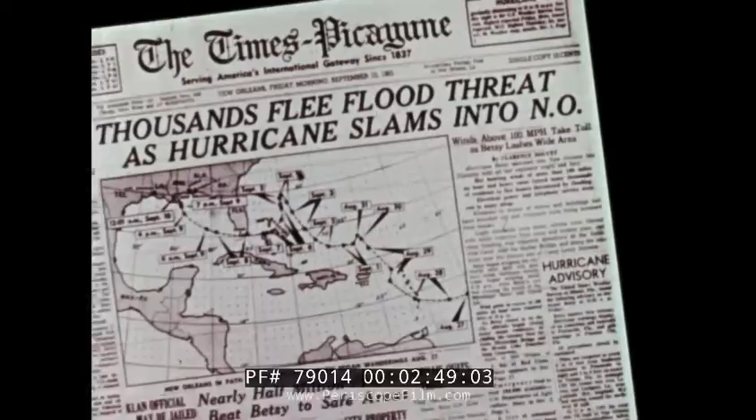But in late summer of 1965, the forces of nature brought the city to her knees. On the night of 9 September and the morning of 10 September, she was struck by Hurricane Betsy, one of the worst storms ever to hit the United States mainland.

As the hurricane moved north on a course paralleling the Mississippi, wind velocity ranged from 70 to 105 miles per hour, with gusts up to 160 miles per hour. Tides rose more than 16 feet above normal in a few hours, and rainfall amounted to nearly 6 inches.

In her wake, Hurricane Betsy left damage estimated at $1 billion in the port of New Orleans alone. Marine underwriters termed it the most costly natural disaster in maritime history. The largest single Navy casualty was AFDM-2, Auxiliary Floating Dry Dock Medium, which since 1943 had served the port from this shipyard on the Mississippi's west bank in the Algiers section of New Orleans.

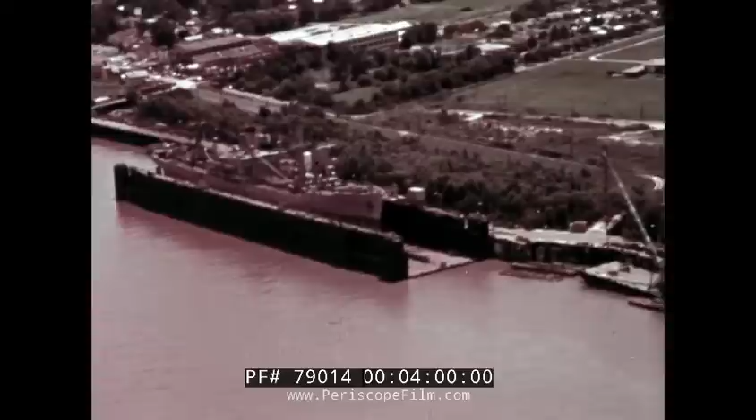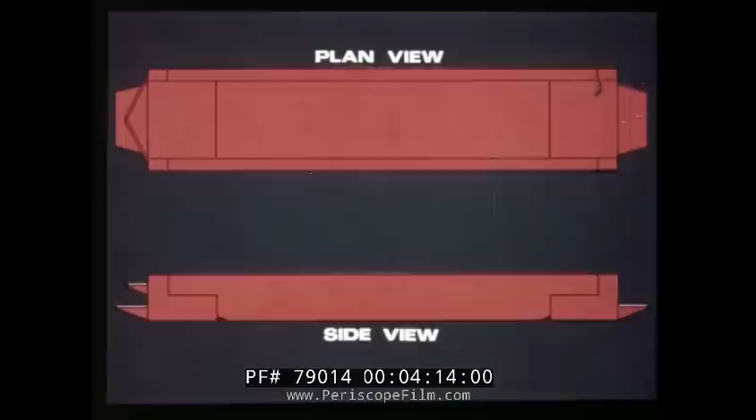She had been operated by Todd Shipyards Corporation under lease from the Navy, and in 23 years had docked more than 2,600 ships. With a maximum lifting capacity of 16,000 long tons at zero freeboard to the pontoon deck, AFDM-2 is 544 feet long, and outriggers at each end give her an overall length of 614 feet. She is 116 feet wide, and her overall depth is 52 feet 9 inches. Her light displacement is 6,360 long tons.

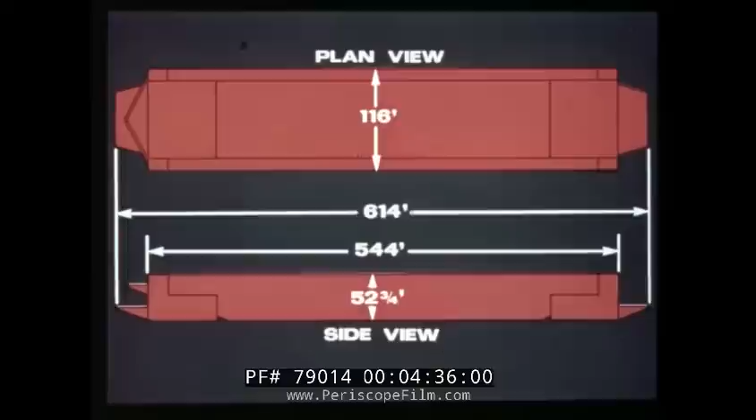When the hurricane struck, AFDM-2 was servicing the SS Elizabeth Lykes, a new automated freighter, shown here docked in a similar facility. As the storm-driven tidal surge roared up the Mississippi, the dry dock was torn loose from its mooring spuds. Still cradling the freighter, she drifted into the river and headed upstream.

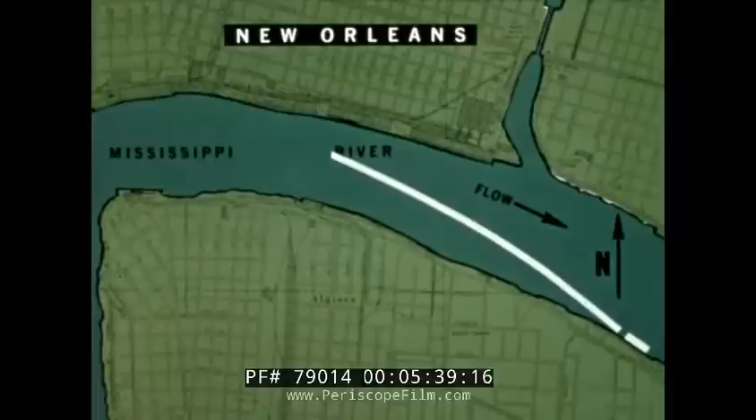Next morning, when she was located, AFDM-2 was completely capsized, barely floating, in water varying from 128 to 180 feet deep. The Elizabeth Lykes, which somehow had miraculously escaped the dry dock and floated free, was found a half-mile away, aground on the levee, but virtually undamaged. On her erratic journey, AFDM-2 had crossed the 1,100-foot-wide river and gone 3 miles upstream. She came to rest some 300 feet off the east bank.

Within hours, salvage experts were studying the situation. In New Orleans, 8th Naval District salvers already were poring over the preliminary report of damage. In Washington, officers of the Naval Ship Systems Command checked the availability of salvage craft and ordered the heavy-duty salvage ships Cable and Curb to proceed to New Orleans immediately. The Cable from its station at Key West and the Curb from its position in the Atlantic off the coast of Jacksonville.

In New York, experts from the Marine Salvage Division of Merritt Chapman and Scott Corporation boarded a plane for New Orleans. By 11 September, representatives from all three were on the scene. They found the capsized dry dock still taking on water and more than 80% submerged. Salvers promptly took steps to keep her from sinking completely.

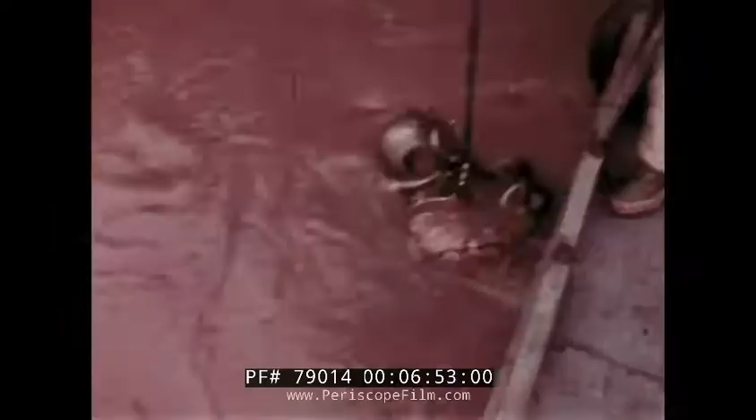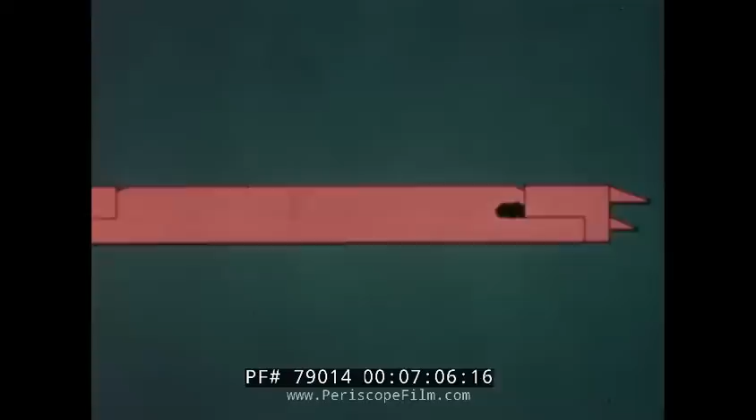A crew of skilled divers was sent down to determine the extent and location of damage. Surprisingly, their preliminary reports were encouraging. Of the more than 100 holes ripped in the hull during the storm, most were small breaks in the wing walls. Only one break was considered serious, an oval-shaped gash at one end of the center section. Measuring 20 by 15 feet, it probably shipped most of the water that caused the dry dock to capsize.

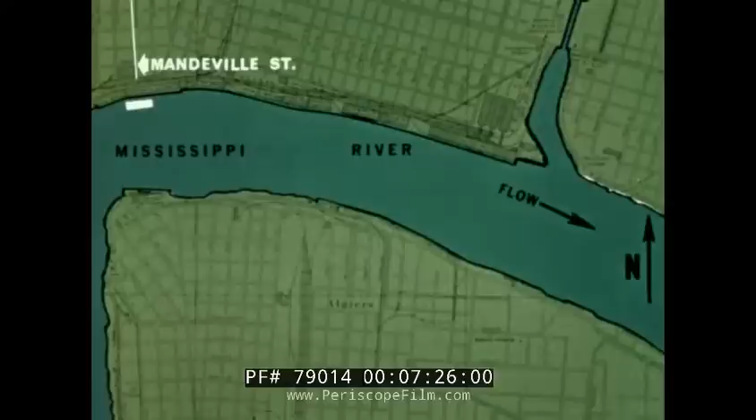One of the first orders of business was to move the dry dock from the east bank off Press and Mandeville Streets, where she was a hazard to navigation, to the west bank off Vallette Street, in an eddy of a bend in the river.

At Vallette Street, divers pinpointed every break in the hull plating and checked the structural integrity of the wall surfaces. They reported the bottom pontoon sections had suffered a few breaks, but were generally in good condition. Internal structural damage seemed minimal. Salvage of AFDM-2 appeared to be technically feasible. But would it be economically sound? Navy and contractor salvers pondered that question.

The Navy built AFDM-2 in 1942 for $2,760,000. To replace her at current prices would cost between $7 and $8 million. Salving her would cost considerably less, and since the dry dock was insured for $2.7 million when the hurricane struck, this sum would be available to defray the cost.

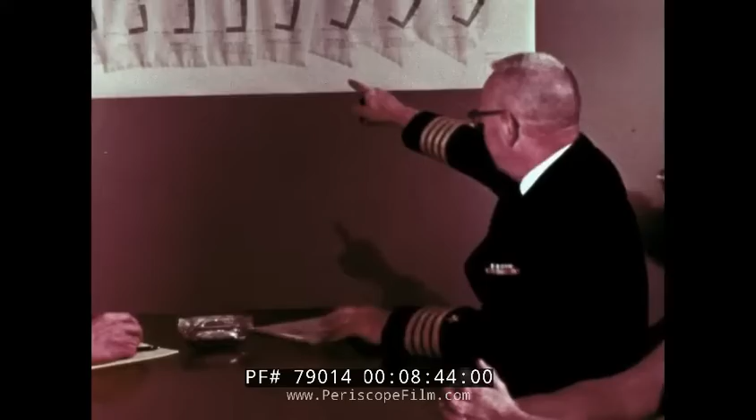The alternative to salving would have to be piece-by-piece removal, a lengthy, costly, and dangerous procedure. It became apparent that if AFDM-2 could be salved at a cost that would be within the total insurance funds available, this would be the desirable course.

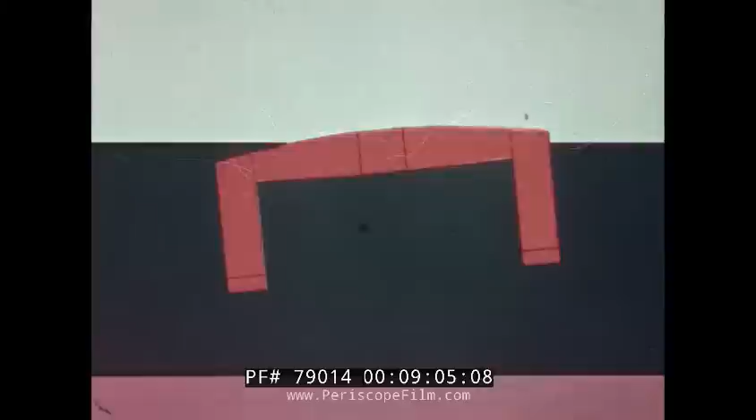On 23 November, the Navy approved a plan to refloat the dry dock and authorized Merritt, Chapman, and Scott to undertake the project. The plan was unique in the long history of Navy salvage operations. Simply stated, the unwieldy dry dock was to be snugged against the river bottom in the capsized position and then rolled up and over through 90 degrees, 160 degrees, and finally 180 degrees toward the river levee, a procedure salvers call parbuckling.

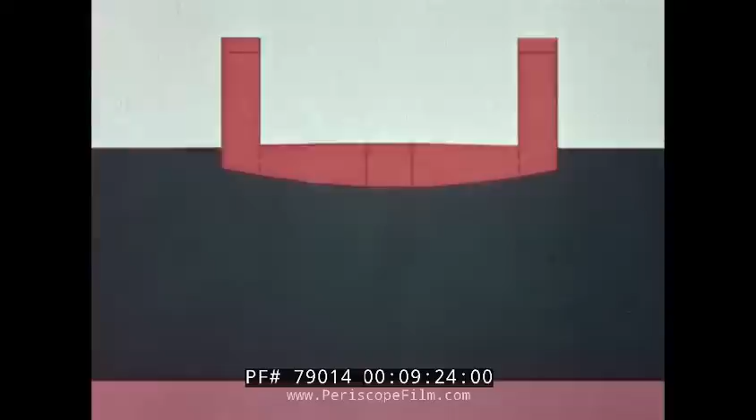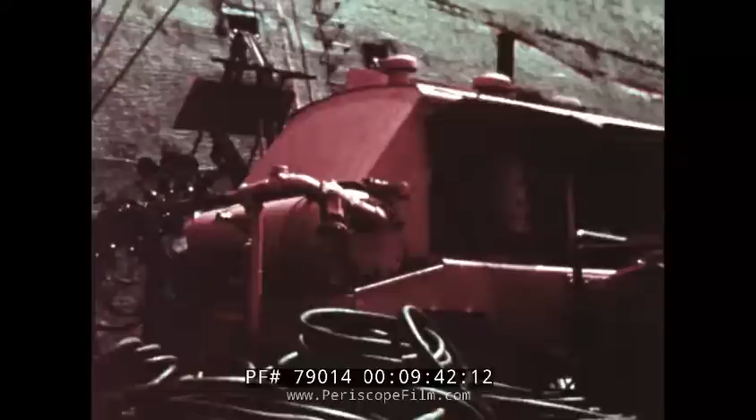The complex plan had the virtue of being designed around individual techniques that had been tested on other large-scale salvage projects: land-based beach gear, ballasting to alter internal weight forces, compressed air to provide internal buoyancy, and large rubber pontoons to provide a source of external buoyancy. This time, however, all four were to be employed in a carefully predetermined combination. The operation was to be accomplished in 12 stages.

As the hull rotated, AFDM-2's basic characteristics, center of gravity and buoyancy and wetted surface, would change constantly under a wide variety of ballast conditions and angles of inclination. So would the stresses and strains on the hull. It would be absolutely necessary to keep the dry dock under constant control during each stage of parbuckling.

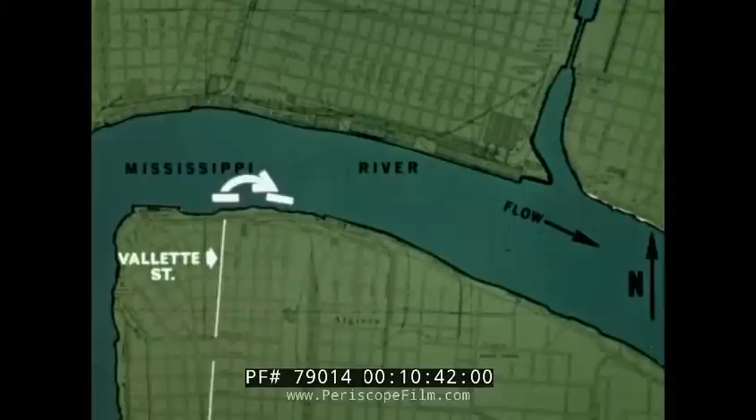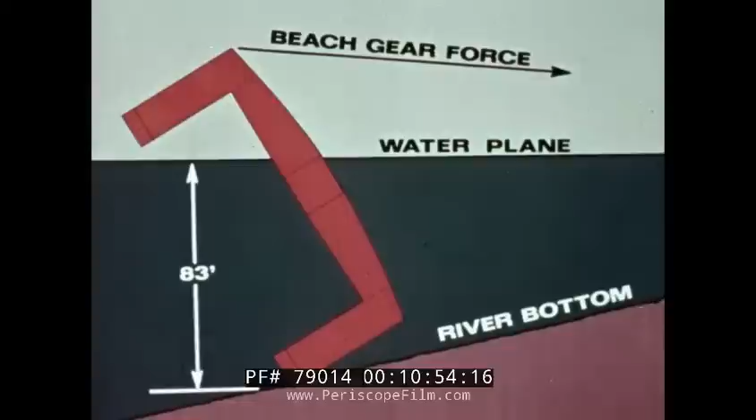The Vallette Street site did not meet the conditions called for in the salvage plan. So on 27 November, the dry dock was moved to a site off Pacific Street, 1,500 feet downstream. Here, one wall of the dry dock could be grounded in a depth close to the desired 83 feet, on a reasonably firm bottom with only a gentle slope toward shore. The site offered adequate space behind the levee for the installation of land-based equipment.

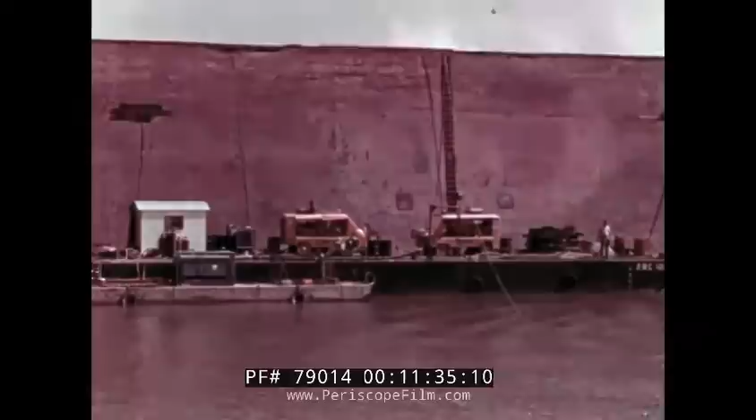Offshore, a number of specialized salvage ships had been assembled. The salvage ship Curb, which was to alternate on the project with her sister ship Cable, each equipped with a machine shop, diving locker, towing engine, anchors, pumps, and compressors. 2 Navy lift ships, Salvager and Windlass, assigned to moor AFDM-2. 3 flush-deck work barges, obtained from the Army Transportation Service. The salvors equipped these with compressors, welding machines, cranes, and auxiliary equipment.

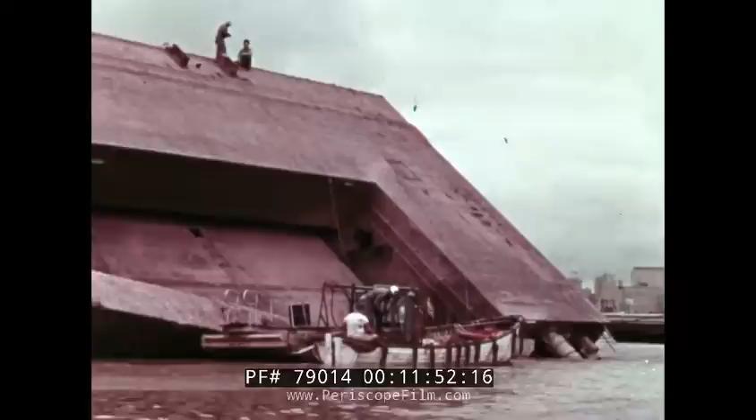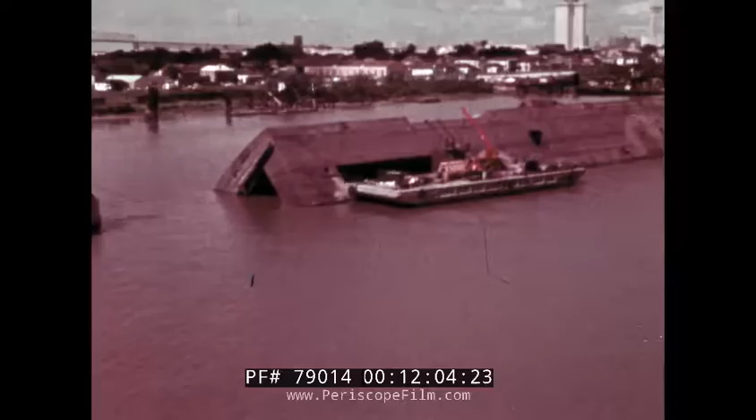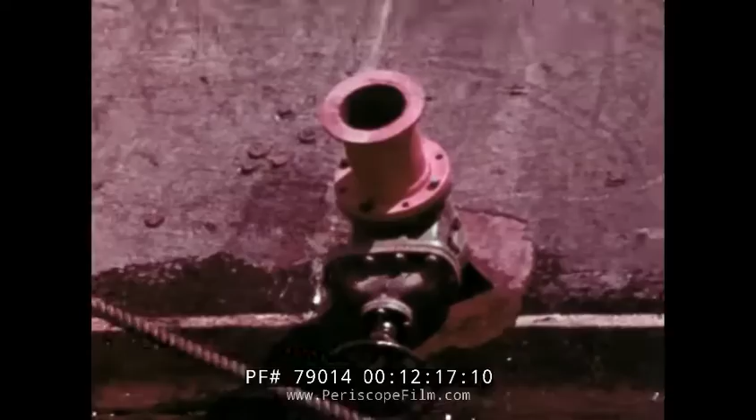Preparing the dry dock for parbuckling required the services of more than 100 skilled specialists. Workers concentrated on 2 jobs: making repairs to the hull that were deemed necessary, and installing the valves, vents, pad eyes, and other fittings to be utilized during parbuckling. Only those holes that would be underwater during parbuckling would have to be patched. Some repairs below and near the waterline were necessary, however. The many air and ballast intakes and vents required for parbuckling also were installed at this time.

2 8-inch gate valves designed for both the intake and discharge of ballast were installed in each of the 8 center section ballast compartments, 1 8-inch gate valve for flooding in each of the 8 ballast compartments of the end sections, and 2 3-inch globe valves in 2 center section buoyancy chambers.

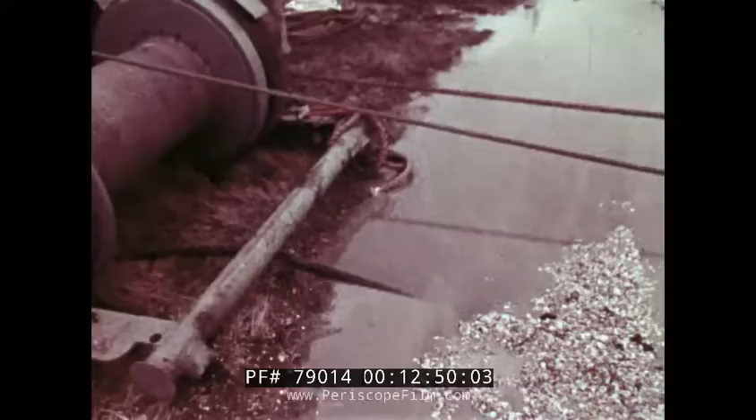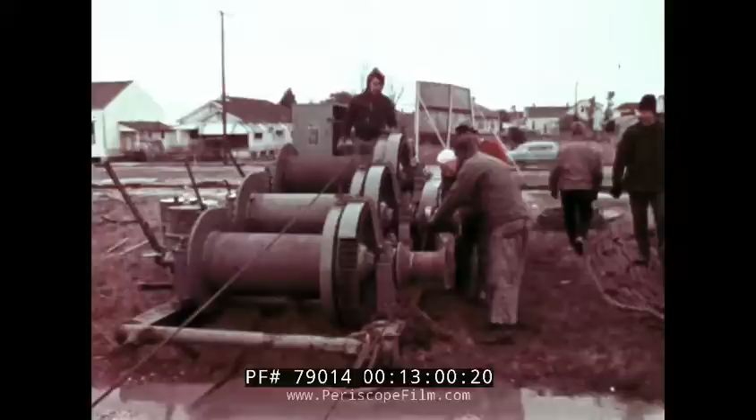On land, another workforce was busy installing the 16 sets of winch-driven beach gear that would provide a vital horizontal pulling force toward shore of up to 680 tons during rotation of the dry dock. Gasoline and diesel-powered winches acting through a 9-part purchase tackle rigged to cables attached to the dry dock would provide the pulling force.

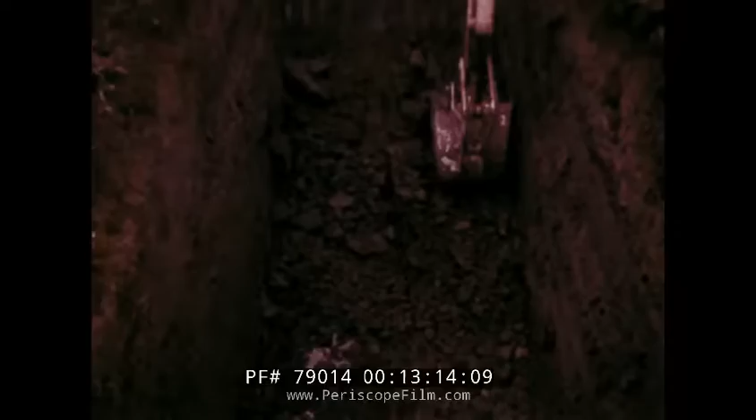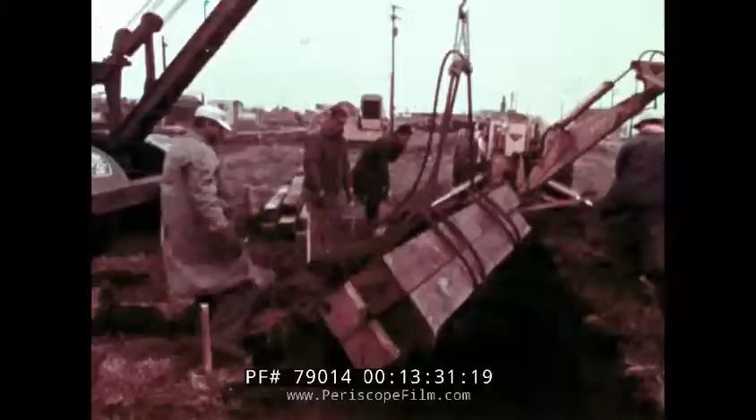Several hundred feet behind the levee, a tractor-mounted backhoe dug 6-foot-deep excavations for the deadmen that would secure the beach gear tackle. The working face of each excavation was lined with 6x6 timbers, and the deadmen, which consisted of 4 12x12 timbers 10 feet long, tied together by a wire cable bridle, were positioned. Then the excavation was backfilled.

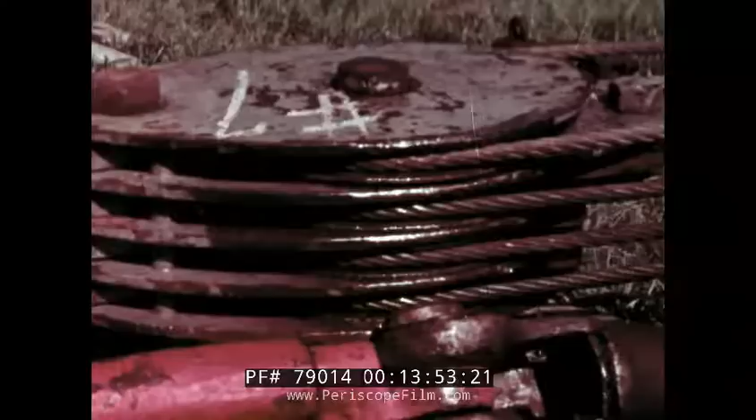To allow engineers to determine minute by minute whether calculated conditions were being met, for the first time on a salvage project, each beach gear set was equipped with a device to provide continuous reading of the force being exerted. A strain-link tensiometer, developed especially for this project by the Navy's David Taylor Model Basin at Carderock, Maryland, was installed between the dead men and standing block of each beach gear set.

Direct reading dials at each winch allowed the operator to check the beach gear pull. Stylus recorders in this communications and control center enabled the project engineer to continuously monitor the entire beach gear network. Adjustments were ordered by phone or radio.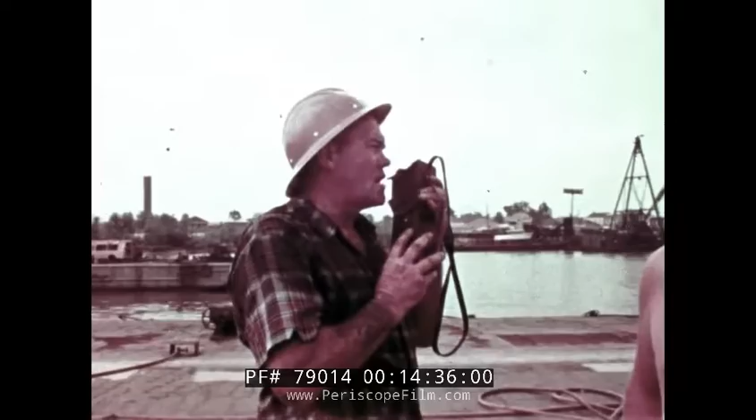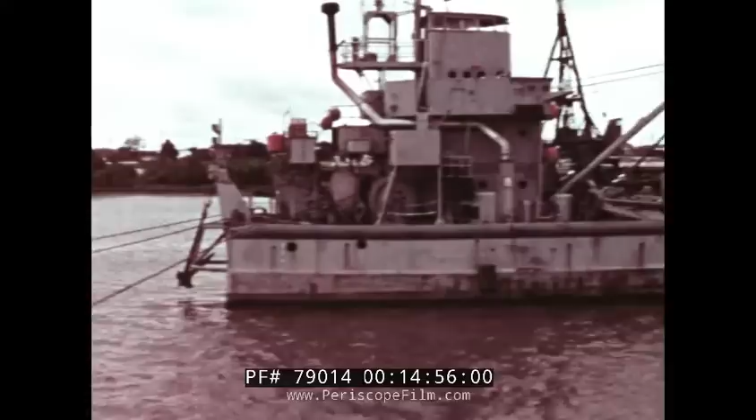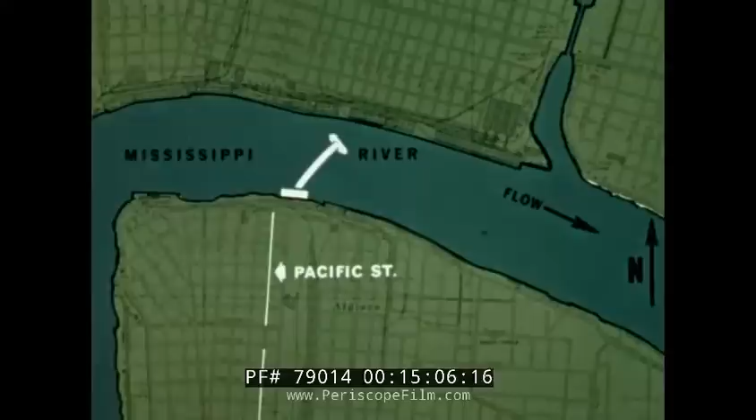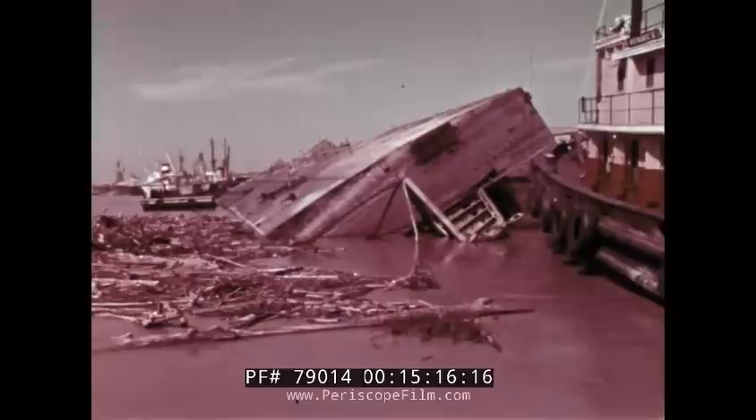By mid-February 1966, preparations on the dry dock had reached the stage where the B-wall could be raised for final repairs and inspection. Suddenly, in the pre-dawn hours of 16 February, a surge of water and debris resulting from upstream floods ripped the dry dock from its moorings. Together with the lift ships Salvager and Windlass, AFDM-2 drifted across the Mississippi under cover of dense fog. They came to rest off the east bank near Congress Street Wharf, approximately 1,400 feet across the river and 500 feet downstream of the salvage site.

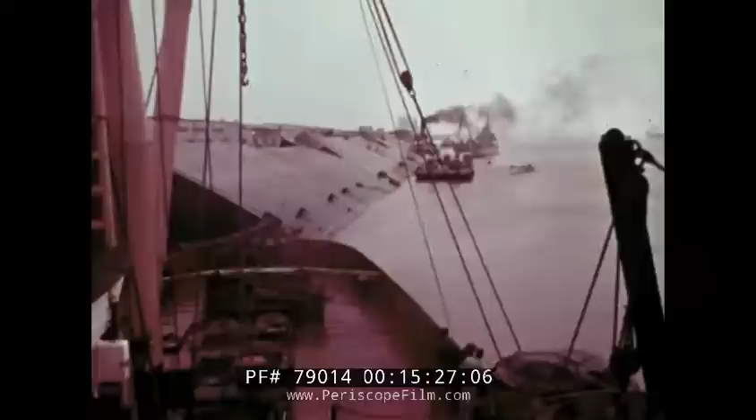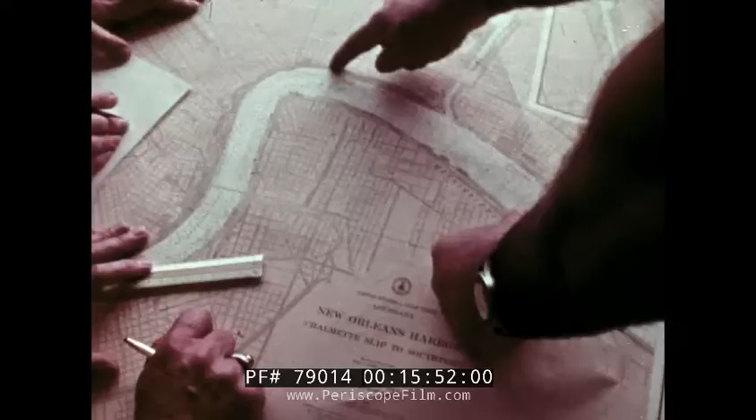The dry dock had suffered no additional damage, but the job of returning her to Pacific Street was a formidable one. The high level of the Mississippi and strong current conditions were the major complications. In marine salvage, however, a basic truism is that the unexpected generally is to be expected. Within a week, the salvers had devised a plan to return the 614-foot dry dock and began assembling the men and equipment to do the job. It required more than 100 men and 12 ships, the Curb, Salvager, Windlass, and 9 local tugs. 13 March, a Sunday, when river traffic is light, was picked as the date.

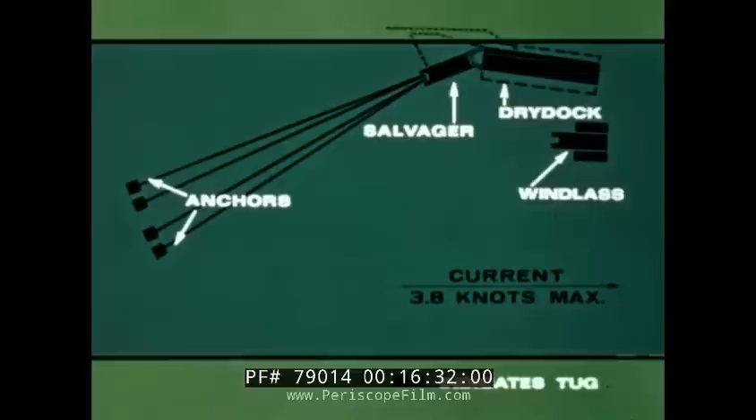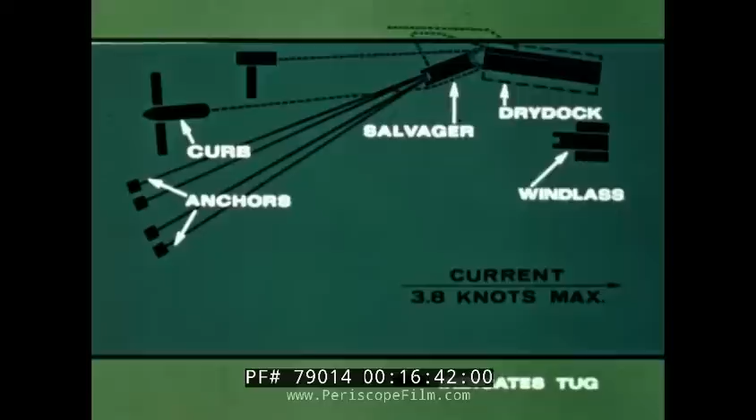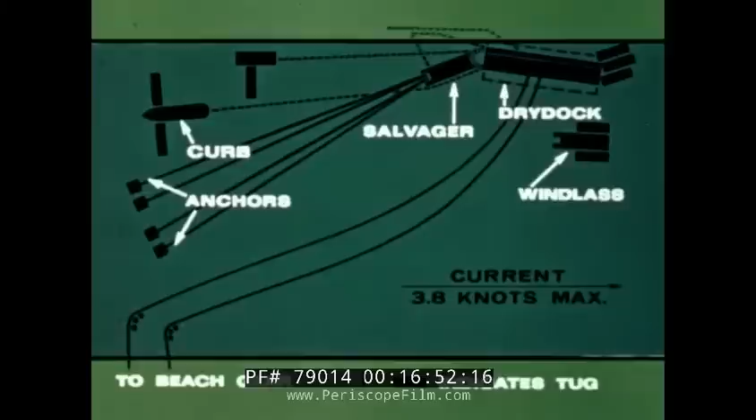The basic plan was to swing the dry dock across the river in pendulum fashion, with a pivot formed upstream of AFDM-2 by 4 anchors planted in mid-river. The arm of the pendulum was formed by cables from the anchors to the Salvager, which was moored to the dry dock. Upstream, the Curb and a 2,400 horsepower tug were assigned to maneuver the dry dock so as to maintain its longitudinal axis in line with the anchors. 3 pusher-type towboats were positioned at the downstream end for the same purpose. Finally, 2 sets of beach gear planted on the opposite bank of the river were attached to the dry dock to control the swing of the pendulum.

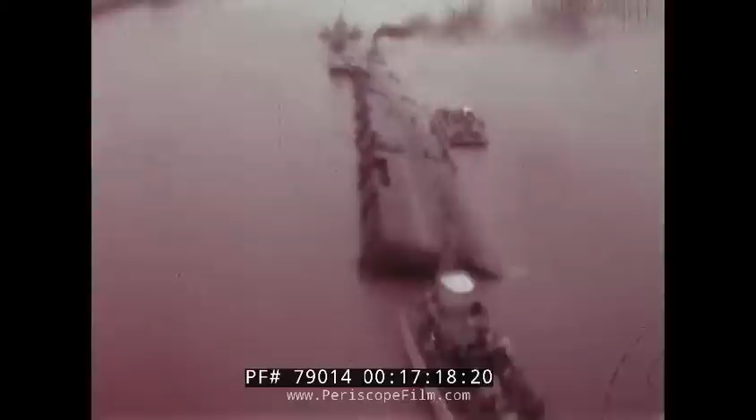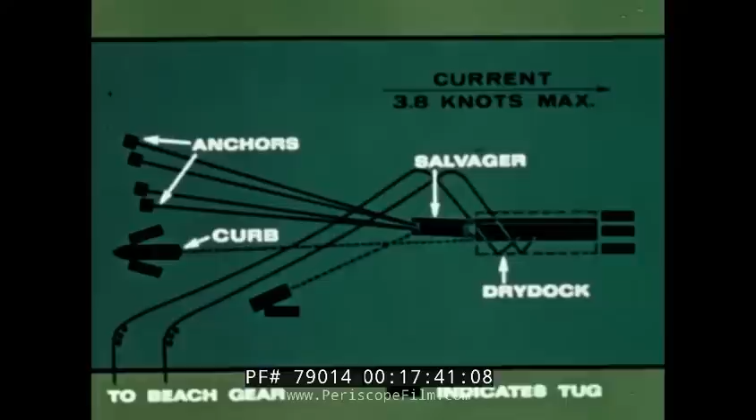With her ballast compartments dewatered by compressed air to float her, AFDM-2 was eased into the channel, where she began to swing on the anchors. In mid-river, however, the strong current caused the anchor moorings to slip, and the winches of the Salvager no longer were able to maintain control of the anchor lines. It became necessary to put into effect a prearranged alternate plan of action. 7 tugs and the Curb, with a total of 15,850 horsepower, were repositioned in this manner to bring the dry dock under control. They pulled and pushed her toward the west bank, where she was secured off Pacific Street at 1818 hours, just 18 minutes behind schedule.

But by now, the Mississippi was approaching its yearly high-level flood stage. Even before the breakaway, engineers had decided to wait until after the annual river crest had passed before undertaking the parbuckling operation. Work on the dry dock was halted for a 3-month period, during which a security crew kept round-the-clock watch on the moorings and adjusted beach cable tensions as the river level fluctuated. By June 15, the Mississippi had fallen to a level that allowed work to be resumed. Welders installed 68 pads for the rubber pontoons, and within a month, all necessary hull repairs had been completed.

Now the dry dock was turned end for end to place her in the proper position for parbuckling. The A wall, the one with the large gash, became the offshore wall. It would remain above water during parbuckling. All that remained was the installation of pads for the beach gear cables. Preparations were completed. Salvers were ready to put into effect the carefully engineered 12-stage plan to rotate the dry dock 180 degrees from the inverted position.

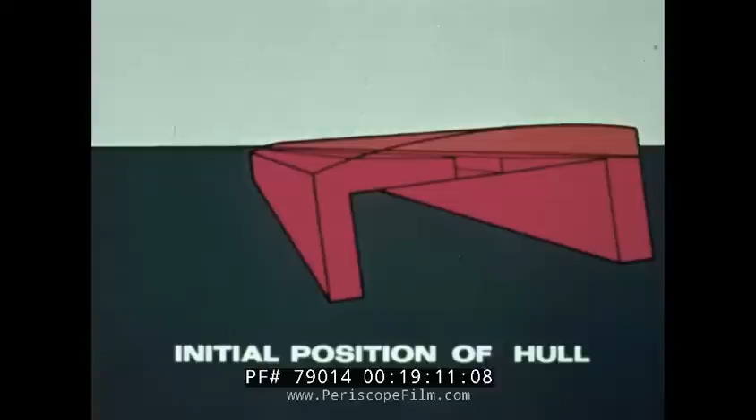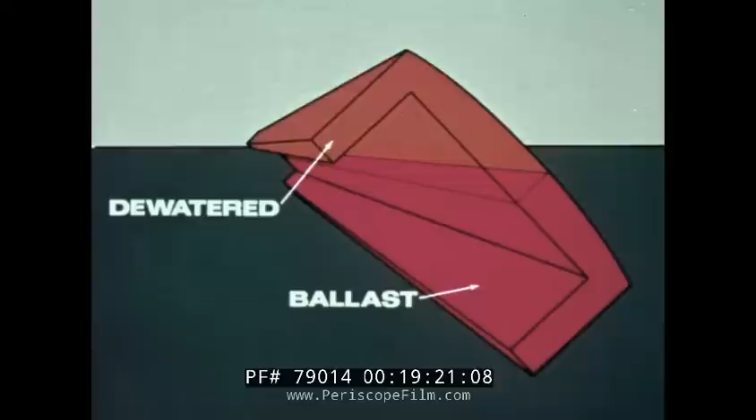Stage 1 called for the B wall to be grounded on the river bottom in 83 feet of water. To accomplish this, 18,900 tons of water ballast were added to compartments in the inshore wall, while offshore wall compartments were dewatered. These steps, however, failed to raise the A wall to the desired goal of 46.5 degrees.

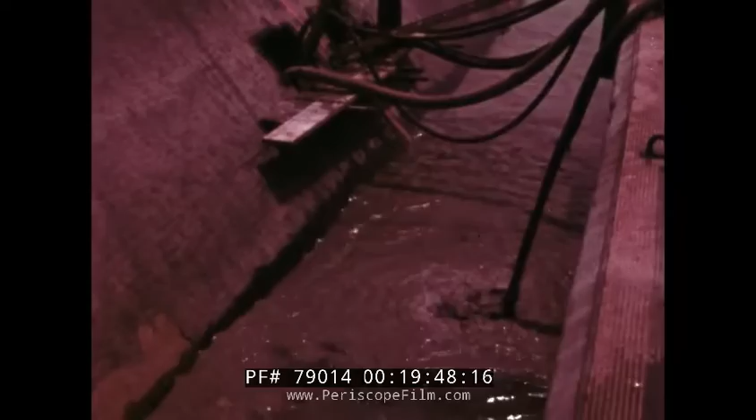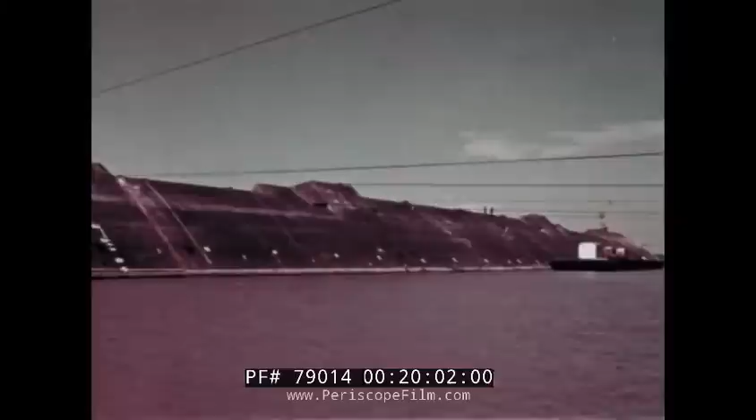Keeping the hull from heeling were large deposits of dense mud that had permeated many of the compartments, especially in the A wall. For 8 days, mud and water, 2,000 tons of it, were jetted and pumped from the A wall compartments. Slowly, the dry dock rotated until it reached 45 degrees, still short of the 46.5 degrees called for by stage 1, but well within acceptable limits.

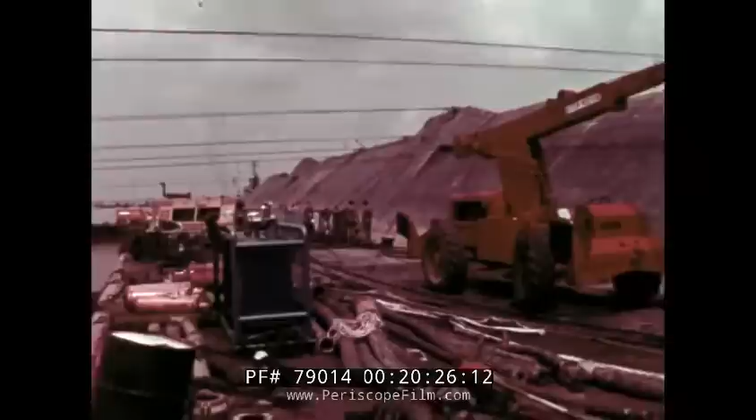To reach stage 2, 60 degrees, the land-based beach gear were to be brought into play. It was calculated that a horizontal pulling force of 551 tons applied to the chine line of the A wall would bring the dry dock to stage 2. But this force failed to rotate the dry dock to 60 degrees. Once again, mud was the problem.

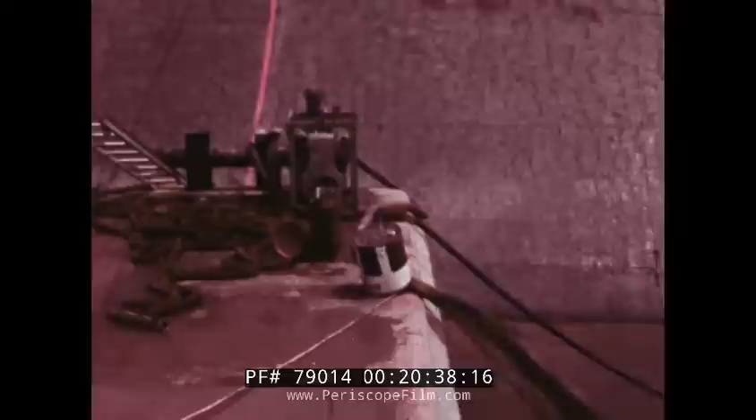Divers found a thick layer clinging to horizontal stiffeners within the hull. Its quantity and location were the upsetting factors. Pumps went to work around the clock, and beach gear force was increased to an average of 650 tons. It took 8 days to reach stage 2.

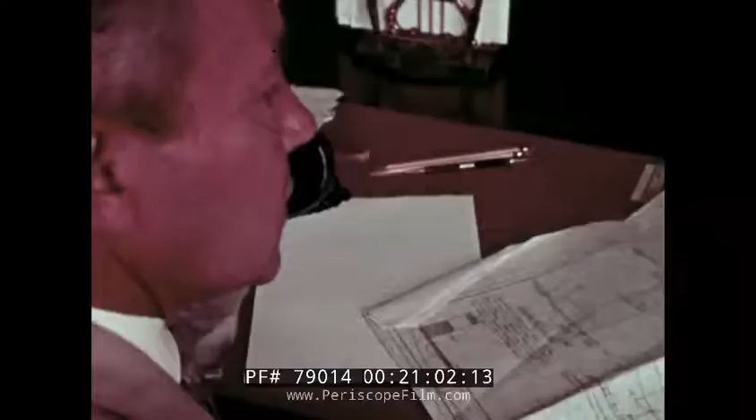The presence of mud was not unexpected. While the engineers' computations had been made on the assumption that comparatively small quantities remained trapped in the hull, they knew this was unrealistic. It was a necessary assumption, however, because it was impossible to determine with any degree of accuracy the location and quantity of mud. The salvage plan had to be based on known factors only, and the engineers realized that field adjustments would be necessary.

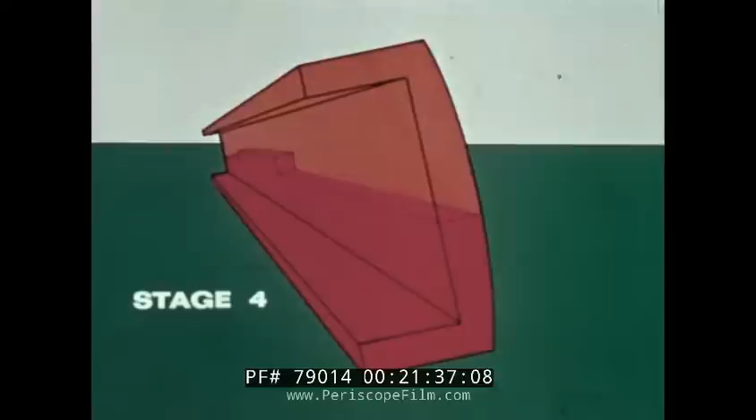The angle of the dry dock was now 59.5 degrees. The key to reaching both the stage 3 position, 70 degrees, and the stage 4 position, 80 degrees, was the addition of water ballast to the center sections. On the day stage 2 was reached, 1,400 tons of ballast were added over a 3.5-hour period to the buoyancy chamber compartments adjacent to the midships transverse bulkhead. 26 hours later, the hull reached the stage 3 position of 70 degrees.

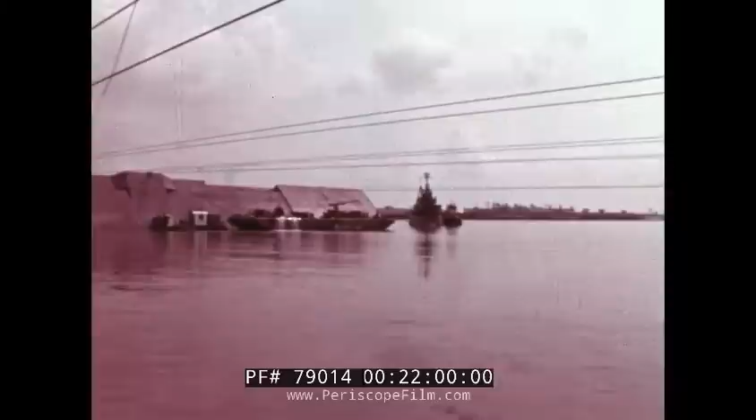As the beach gear force was increased to 600 tons, the dry dock rolled steadily to 80.5 degrees from the inverted position, half a degree more than had been calculated for stage 4. Now the operation entered a crucial phase. When the salvage plan was formulated, it assumed a level river bottom under the B-wall as it moved into the 90-degree position. Actually, the salvage site sloped upward toward shore. In the planning stage, engineers realized that the slope could offer enough resistance to the beach gear force to prevent the dry dock from rotating to 90 degrees.

Dredging the site to level it before the dry dock was positioned had been considered. However, there was always the chance that the river might wash out enough mud to reduce the slope, or that the weight of the dry dock might compact the mud enough to allow the dry dock to settle. If either action took place, dredging could be avoided. But the hoped-for scouring action or compaction did not occur, and the dry dock held at 83.5 degrees. In a further attempt to eliminate the need for dredging, several operations originally scheduled for later were undertaken.

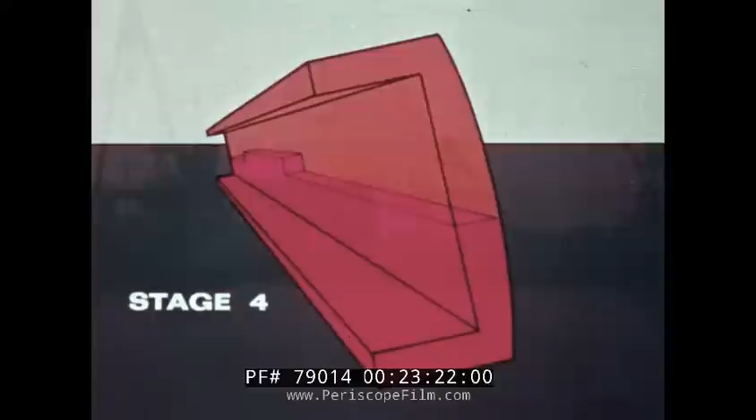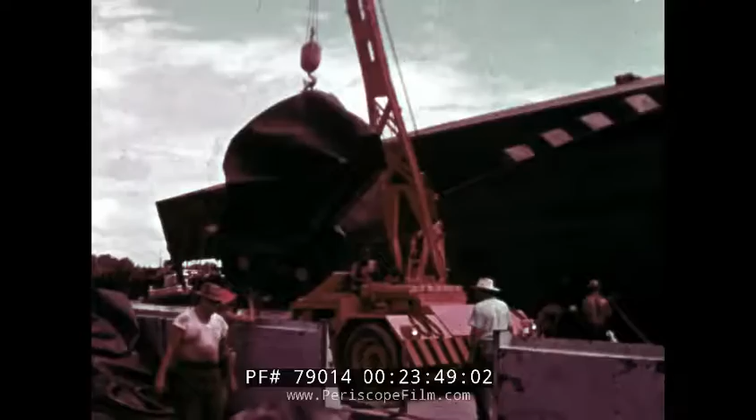First, 2,500 additional tons of water ballast were added amidships. Beach gear force was maintained at 650 tons, almost 200 tons higher than had been contemplated. Finally, engineers decided to employ the third force, the air-filled semi-sealed rubber pontoons that originally were scheduled to furnish an external buoyant lift at stage 6. Similar collapsible pontoons have been used on salvage projects before, but never in this quantity, nor in this manner.

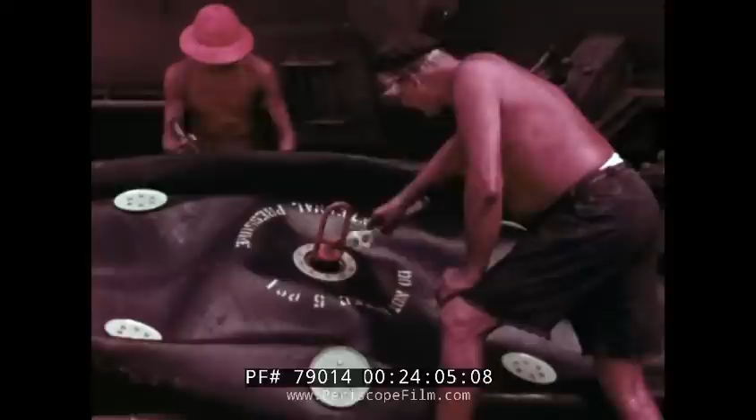This salvage plan called for a total external buoyant lifting force of 600 tons to be applied by 68 pontoons attached to cables secured to the weather deck of the B-wall. The 3/4-inch thick rubber pontoons were 8 feet high and 7 feet in diameter when inflated. Each provided a buoyant force of about 8.5 tons. They were not completely sealed. A 9-inch diameter opening at the bottom provided access for air and venting. On 11 August, with the first 10 pontoons in place, 800 tons of ballast were added.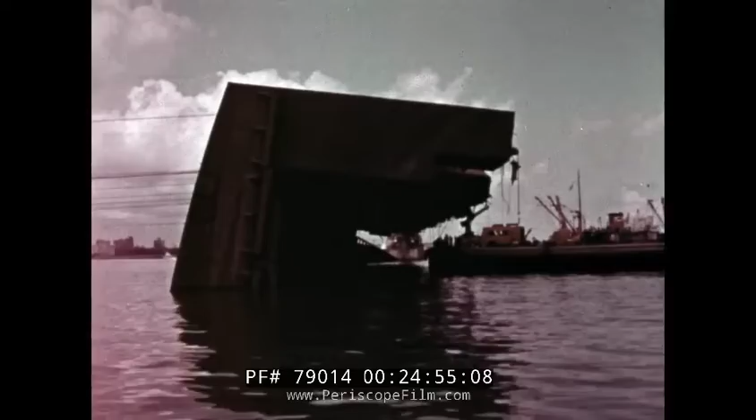Next day, 15 more pontoons were installed and 500 additional tons of ballast taken on. 31 more pontoons were attached in the next 2 days, but still the dry dock failed to heel. Dredging was necessary. On 15 August, a dredge began to cut a trench extending along the shoreward chine line about 2/3 the length of the dry dock. The trench, 15 feet wide and 10 feet deep, was completed in 2 days.

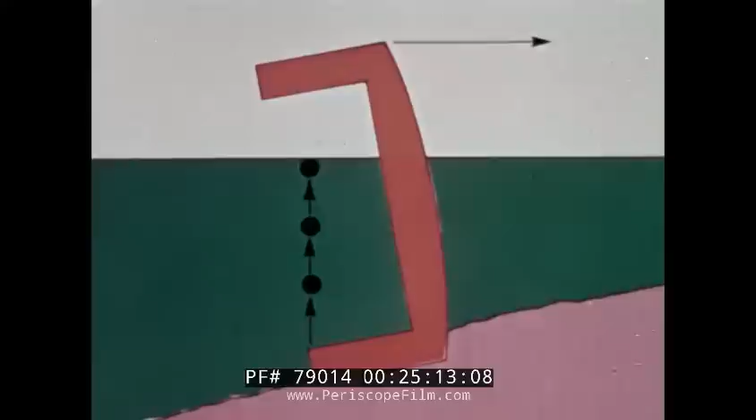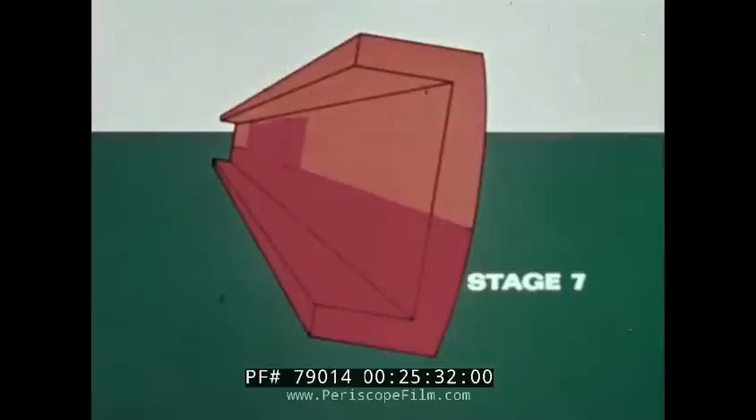As the dredge pulled away, the beach gear sets were stressed to pull the dry dock into the trench. Within hours, it rotated through the critical stage 5 position of 90 degrees, through stage 6, and reached 100 degrees, stage 7. Meantime, the beach gear force gradually dropped until at stage 7, only 250 tons were required to hold the dry dock in equilibrium at 100 degrees.

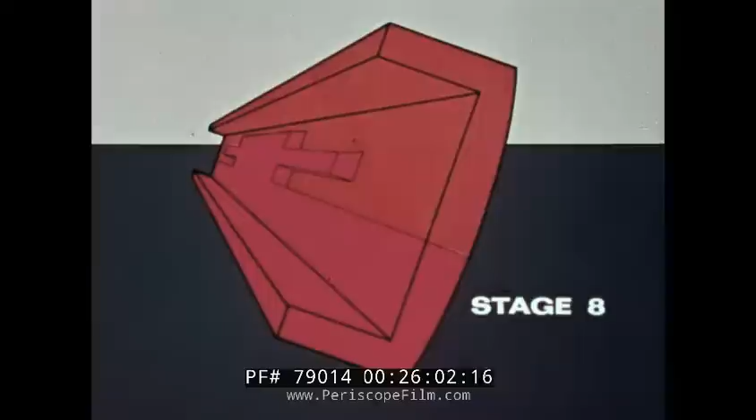The following day, this pull was increased to 315 tons. The dry dock came easily to 109 degrees, only 1 degree short of the calculated Stage 8 position. Stage 9 called for the dry dock to reach 120 degrees. On 19 August, after 2,100 tons of water ballast were added to increase the total to the 5,900 tons calculated for this stage, the dry dock rotated to 118 degrees within acceptable limits. Beach gear force was 150 tons, exactly as planned.

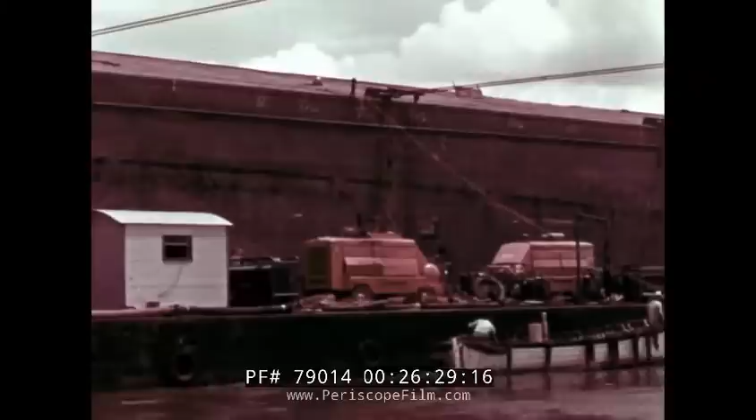Now the salvage crew prepared for another crucial period. It was time for compressed air to replace beach gear as the prime force rotating the dock. The plan called for the injection of enough compressed air to blow 560 tons of water ballast from the center section of the B wall. While the center section was being deballasted with air, 2,000 tons of water ballast were added to the end sections on the A wall. The amount and pressure of air in the hull had to meet extremely close tolerances to avoid overstressing the dry dock structure.

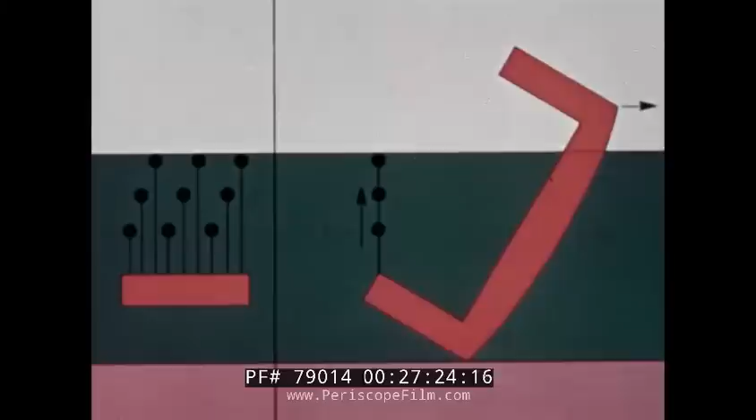Back pressure readings were to be 25 pounds per square inch, but not over 26. Beach gear force was dropped progressively from 150 tons to 0. The pontoons had been attached in 3 tiers by varying the lengths of the pendants that held them. This would allow their lifting force to be dissipated in 3 increments of 200 tons each, instead of all at once. As each tier broke the surface separately, the righting moment would be reduced in steps, thus providing an important restraint on the rate of rotation.

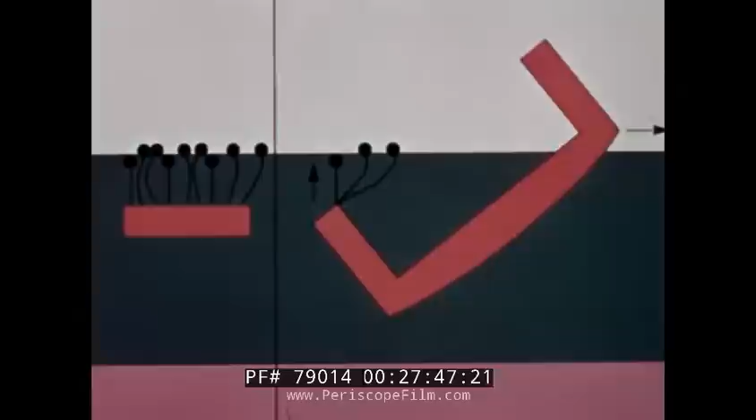The stage was set for the righting moment on the dry dock to be supplied by unbalanced forces within the dock, and the external buoyant lift of the rubber pontoons. On 21 August, at 05:30 hours, AFDM-2 started her slow, controlled rise as Tier 1 broke the surface, then Tier 2. By 05:38 hours, Tier 3 and the submerged wing wall came up. The last critical stage had been completed successfully.

The dry dock now was afloat at 161 degrees from the inverted position, 1 degree more than calculated for Stage 11. Actual conditions and those predicted by the engineering calculations were remarkably close. Air pressure in the B-wall compartments had been calculated at 6.5 pounds per square inch. Actually, it was 7. Ballast in the inshore compartments was to be 2,605 tons. Actual water ballast was only about 2,000 tons, but approximately 600 tons of mud still trapped in the compartments made up the difference. The offshore chine line was to be 42.5 feet below the surface of the river. It stabilized at 41.5 feet.

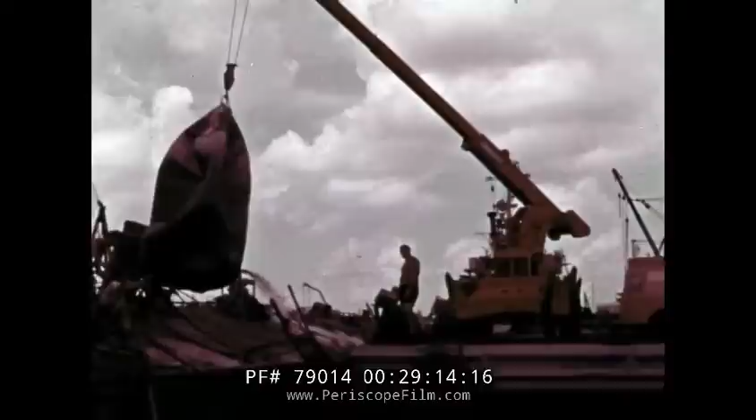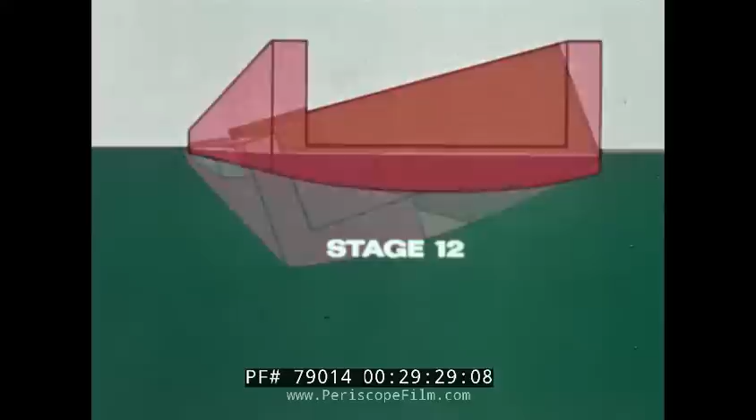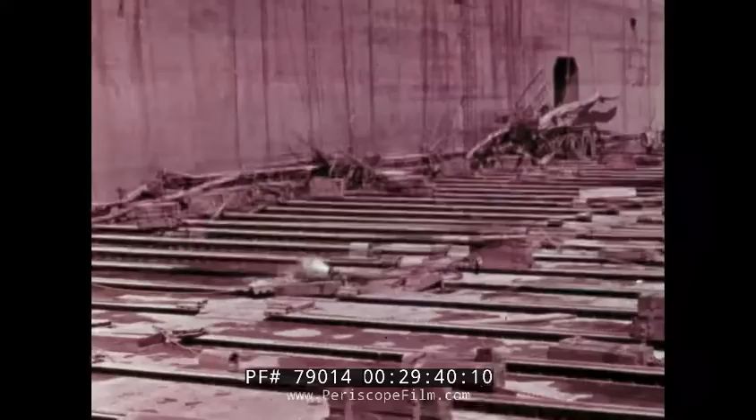With the hull in the 161-degree position, the ballast vents were closed and the compartments under air pressure were bled down. 4 days of dewatering slowly brought the dry dock to an upright position. With salvage equipment and accumulated debris cleared from the dry dock, all that remained was to transfer AFDM-2 to a shipyard for further repairs and refurbishment.

On 25 August 1966, the salvage ship Cable and 2 local tugs turned her end for end off Pacific Street and began to tow her 2 miles downstream to the Algiers facility from which she had broken loose 11.5 months earlier. Thanks to the successful completion of an imaginative, well-executed salvage plan, AFDM-2 would once again take her place as a valuable ship repair facility in the port of New Orleans.